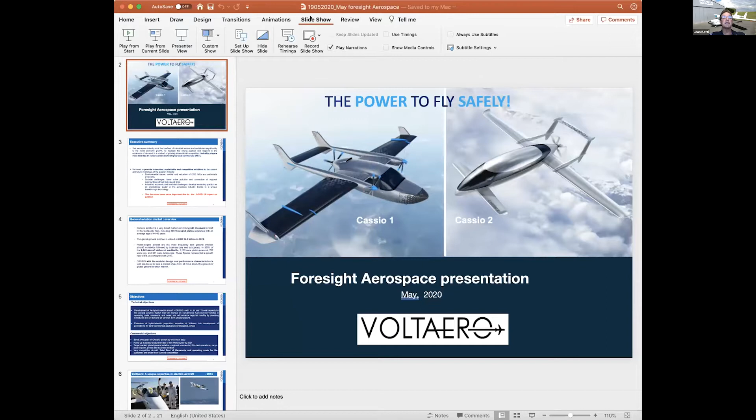Yeah, okay. So listening to Neil, there is not much I can add to that. I think he made a very good summary and assessment, and I fully share his view, quite frankly.

So what you see in front of you are two designs. One is our demonstrator, which I will come back to in a sec, that we're flying right now, fully hybrid, and we have tested 3 versions. Now we're at version 4, the 10 seats. On the right side is Cassio 2, which will be the future production aircraft, the one that will go into production, derived in 4, 6, and 10 seats. So remember these pictures because we will see them along the way.

If we look at the industry, and I'm not going to dwell too much on this because Neil just said it, there's going to be a lot more environmental issues. We're going to have to remove aeronautics from the environmental equation, even if there's sometimes a bad perception about that. Those issues are going to stay there. There's also going to be societal challenges like noise, pollution, connection to regional communities—those are going to have to happen without high-speed links.

And finally, you've got plenty of territorial challenges—we heard about Gatwick and all that just before, and it's true, we have to use what we have better. Today we don't use what we have, we don't optimize it. And this becomes even more important due to the COVID-19 impact on aviation, because people want to make sure they don't go into big crowds—at least some of the population—we want to be able to go to airports in all safety, not crowded, waiting 2 hours in line and so on.

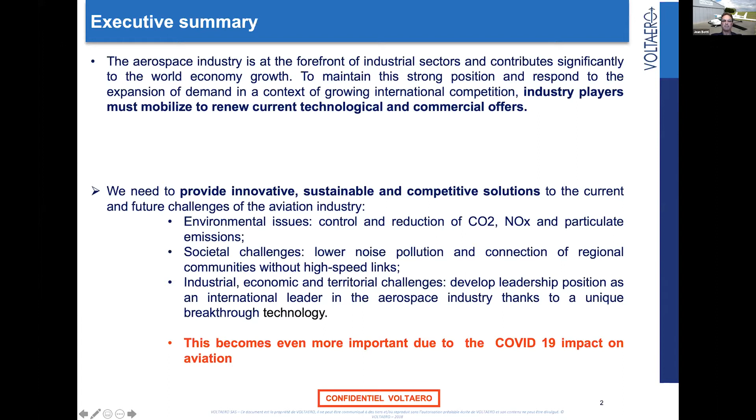So it's going to create some new opportunities, specifically for general aviation. And if we look at that market, it was already valued in 2018 at 24.2 billion, with lots of aircraft in the fleet, and a lot of old aircraft in the fleet. 360,000 piston airplanes have an average age of 44 to 46 years.

So there is a big opportunity to start something new here. And I'm not going to say that a hybrid aircraft—I have seen it written so many times that it's going to be a miracle. Electric hybrid in terms of total cost of ownership are going to be miracles—no, they will be competitive. They will be competitive with piston airplanes of today, but don't expect the total cost of ownership will be drastically changed. I want to make that point because we see so much fake news on this.

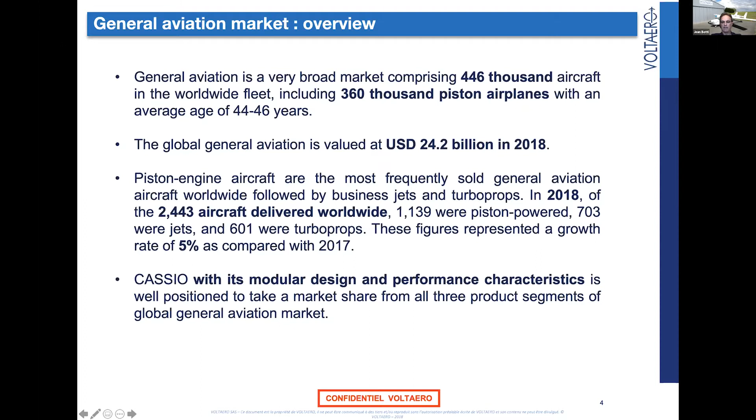Anyway, Cassio, with its modular design and performance characteristics, is really well positioned to take itself into this market. And we have 3 segments that I will expand on. First of all, if we look at technical objectives, the 4, 6, 10 seats is for general aviation.

And it's going to have to replace fuel-powered vehicles, obviously. It's going to have to have better operating cost—not a huge better operating cost—but better emissions and noise. And it's going to enhance regional mobility by providing scheduled, on-demand air services for smaller airports. It's also going to be very good for postal services, deliveries, medevac. This is going to be an extension of what we can do with our Cassio.

And we also, as VoltAero as a company, are expanding into powertrain development for other commercial applications, in particular helicopters and UAVs. Our commercial objectives are to put the Cassio, the 330, the 4 seats, into production by the end of 2022.

And we're planning to be at a rate worldwide, including Asia and the United States obviously, by 2024 at 150 planes per year. The target market is regional commercial, thin-haul operations, cargo, point-to-point, private and business aviation.

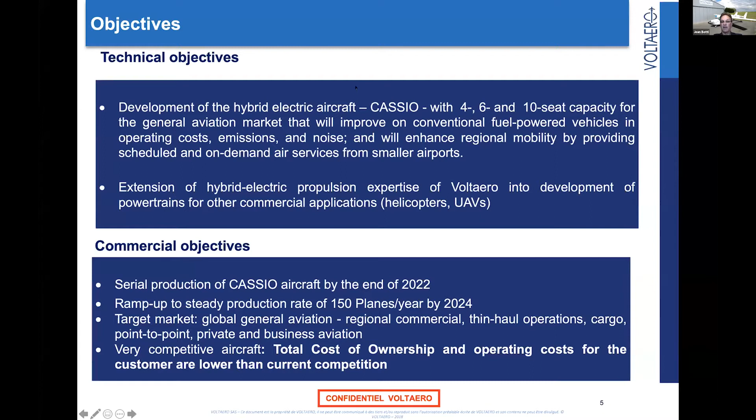It has to be a very competitive aircraft. We've done all the simulations based on true flights, true apple-to-apple comparisons, and we have a cost of ownership that is lower, but not drastically lower. It depends on whether you fly most of the time in hybrid or full electric, and if you start with charged batteries or have to recharge in flight.

Didier Esteyne is my associate, together with Marina Evans. We are 3 co-founders, and Didier was the one who crossed the channel during the historic flight in 2015. Before that, in 2011, we had flown the Cricri, a smaller 20 kilowatt aircraft that did acrobatics, then we went to a 60 kilowatt aircraft with the E-Fan in 2015, and now we're flying the 600 kilowatt hybrid airplane.

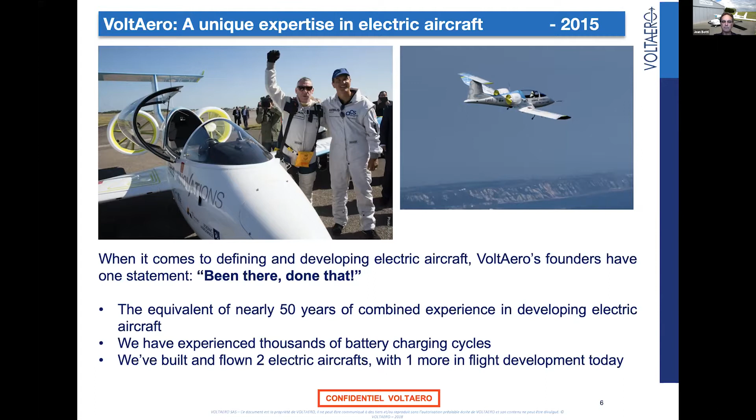The Cassio airplane has a modular concept, dual source of energy, noise reduction, and 200 knot cruise speed, which is very competitive with respect to the competition. I'm thinking about the Cirrus SR-22, Cessna 172, 73, Piper. Those are the kind of airplanes we are up against here.

Fuel economy and range varies depending on your mission flight. You cannot say hybrid is that much less than conventional, it doesn't work that way. You have to calculate each segment, and from each segment determine if you're in full electric, hybrid, mild hybrid or heavy hybrid. That has a direct impact, and that's how you calculate your cost of ownership, being TCO or DOC.

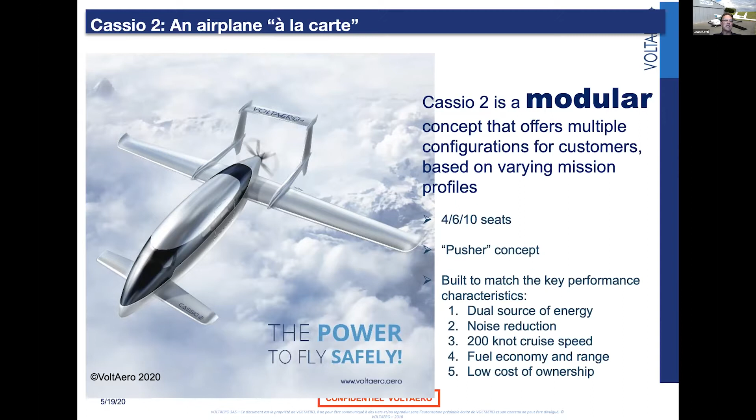It's going to be in the category of CS23. It will have 3.5 hours of autonomy with a possible extension to 5 hours, range of 800 miles, and takeoff and landing distance less than 1,800 feet. It will be able to land and take off from both paved runways and grass runways.

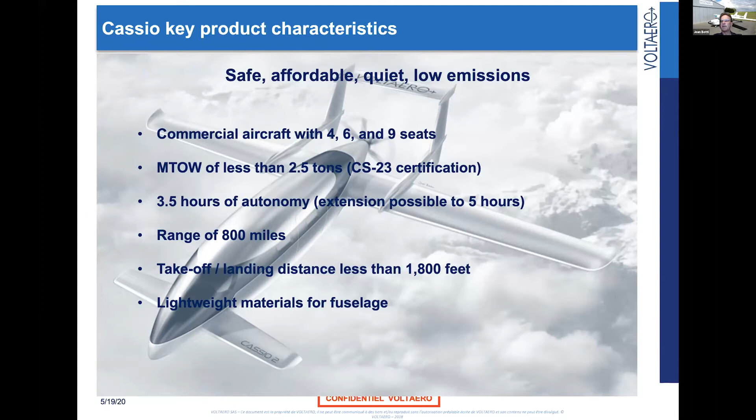In terms of power, the 10 seat version will have 600 kilowatts of power, the 6 seat version will have 480, and the 4 seat version will have 330. Those are all being validated in our Cassio 1 prototype.

I already spoke about the speed, and in terms of emissions, we can go from 20% lower in full hybrid mode to 100% if you have trips less than 200 kilometers. There you will fulfill your mission in pure electric.

Our design and concepts are all patented, and this concept of a dual source of power - being series hybrid, parallel hybrid, pure electric or pure thermal - provides unmatched safety, quite frankly, because we have multiple redundancies in the powertrain.

It's compatible with biofuels. In terms of noise, we are shooting for -4 dBA compared to conventional competition with silencers. If you take, for example, the SR-22 with a silencer, we should be around 4 dBA less than that. And there's no noise during taxi operations, there are no turning propellers in our airplane when it's taxiing.

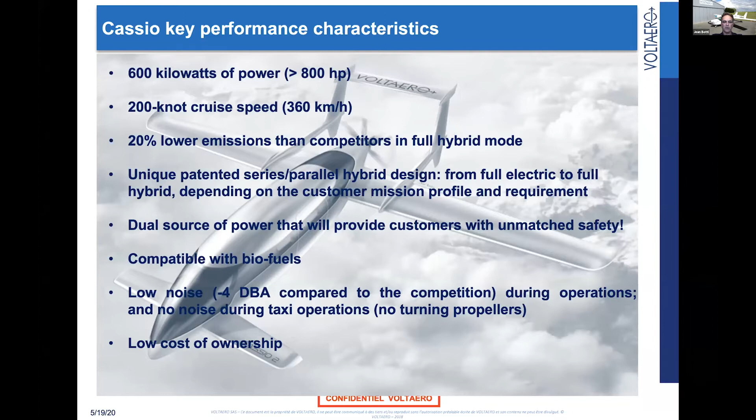I talked before about low cost of ownership. It's what I call an airplane a la carte. Basically Cassio can, depending on the profile you have, if you're in the range of 0 to 200 kilometers, 200 to 600, or 600 to 1200, you're going to use your airplane - and all of them can be used that way, the 4, 6 and 10 seats - you would do pure electric, mild hybrid, or heavy hybrid.

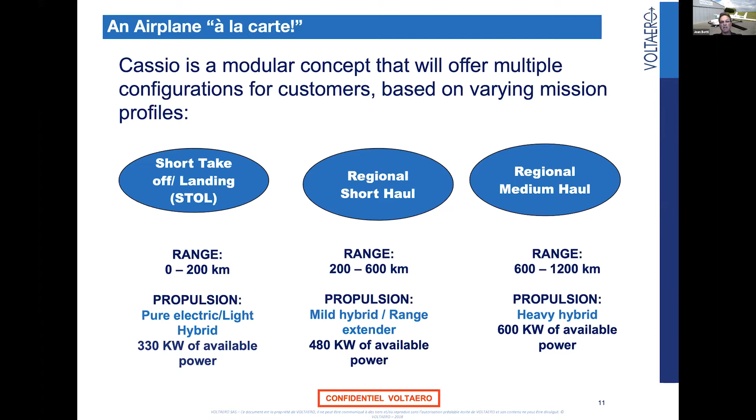The configurations that we have done are all studied to be able to fulfill these requirements, and obviously in each one of those segments your fuel economy will be very different from baseline.

So these are the airplanes that I was talking about before, that we are competing with our Cassio airplanes - very conventional ones, right now very well known. As I said, today the fleet is getting very old, and it offers an opportunity for us to jump in.

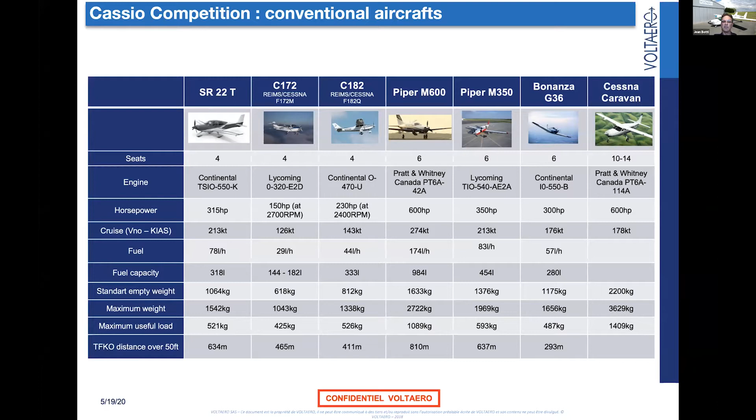If you look at the application by market, in red those are the routes, the number of daily flights that are less than 1 hour. In gray, those are the routes between 1 and 2 hours, and it's a lot of flights. So there's a lot of opportunity to fly between 1 to 2 hours, and even less than 1 hour, and that's why the application can be very different depending on the mission profile you have.

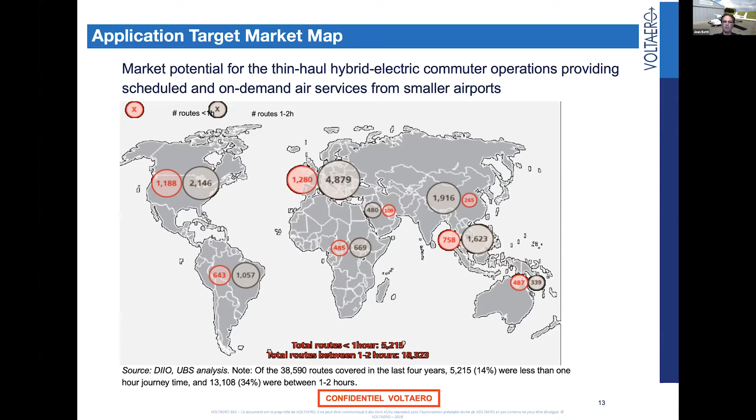Our timeline is to be in production by the end of 2022 with the 4 seats. 6 months later, we go with the 6 seats, and 1 year later, we go with the 10 seats. Right now, we are at proof of concept.

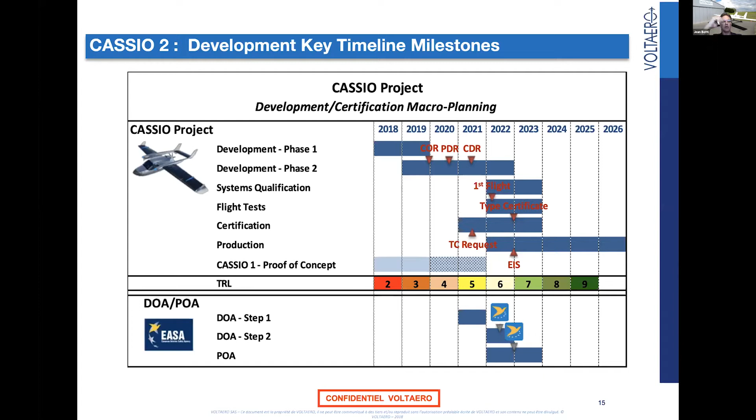We're finishing Cassio 1 completely, and we will have done all the testing of 4, 6, and 10 in terms of powertrain. That test bed will continue to help us develop Cassio 2.

I wanted to show you our airplane. So this is the flying airplane, and on the right side there is the Iron Bird, which we used for all the previous validations and modifications before putting that into the flying plane.

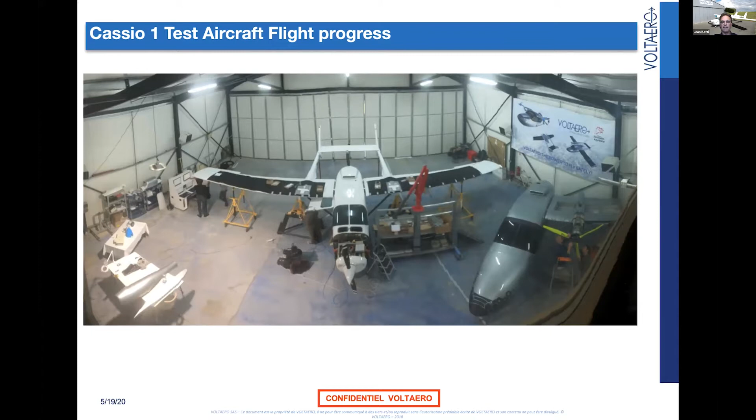This is our version 3 that we just flew last week. We had special permission, because we're confined with the coronavirus, to be able to still fly, since it was for professional use and testing.

This is the test we have done on the 4 seats. I'd like to show you a little movie of these flights, one of them, because we did 50 flights with this airplane.

So this is the 4 seats, with 2 Safran engines, electric engines in the front, thermal engine in the back, and that was the low version.

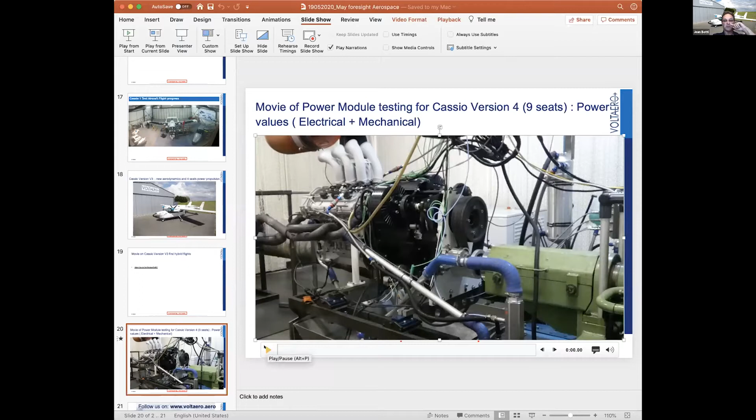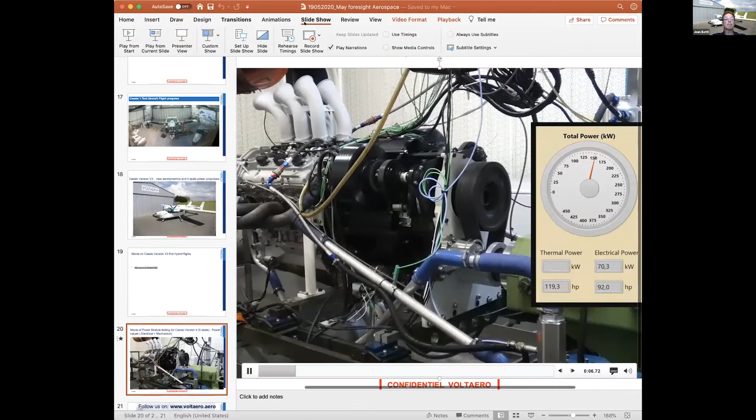Here we go, pay attention to the gauges on this. Sorry, I had to do that again.

So you can see we get to 600 horsepower on this hybrid rear power plant with 3 electric motors, and we will have 2 electric motors in the front.

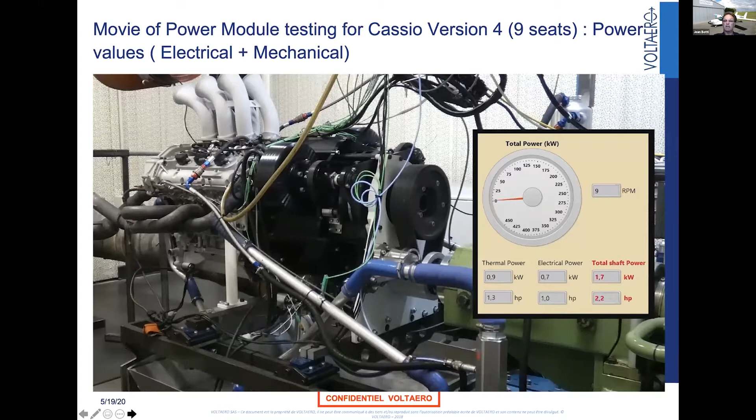This is right now on the test bench doing all the validations, all the mapping. Due to the coronavirus, we had to stop for a while, but we're back on track now, and we will fly this bird, the 9 seats powertrain, in July.

So this is where we stand right now. For us, the powertrain will be totally validated in all the versions, and as you can see, this will be the new design. If you pay attention, this is the 6 seats.

And that concludes my presentation.

That's brilliant, thank you very much sir. It's always interesting to see aircraft flying. I certainly miss it. As you heard during the webinar earlier, when an aircraft flies overhead, I'm outside either with my noise meter trying to find out how noisy it is, or on flight radar trying to find out what's going on. So thank you very much for that.

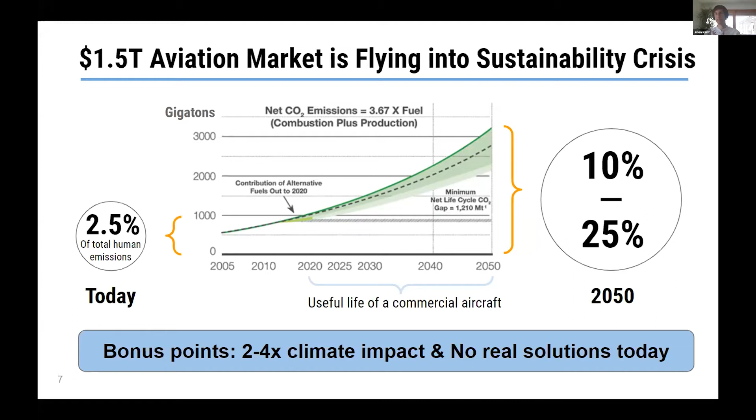The way we think the industry will get out of this crisis is by using renewably powered hydrogen electric aviation. Our role in this is shown on the right-hand side of the chart, as the powertrain provider. We work with leading suppliers on the fuel cell system, electric motors, prop pitch controllers, and similar components. We integrate everything, and work with airframe manufacturers, because we think they know how to build airframes pretty well, and we work with them to bring that product to market.

Even if we had a product in the market today, it wouldn't be much use, because to get hydrogen and electric aviation to take off, you also need to think about the ecosystem that needs to be in place, at the very least hydrogen production. The way we think about it is that you get not only the best environmental performance, but the best economic performance, if you employ localized generation of hydrogen through electrolysis. Because of the scale that sub-regional aviation can have, that becomes the most economically meaningful as well.

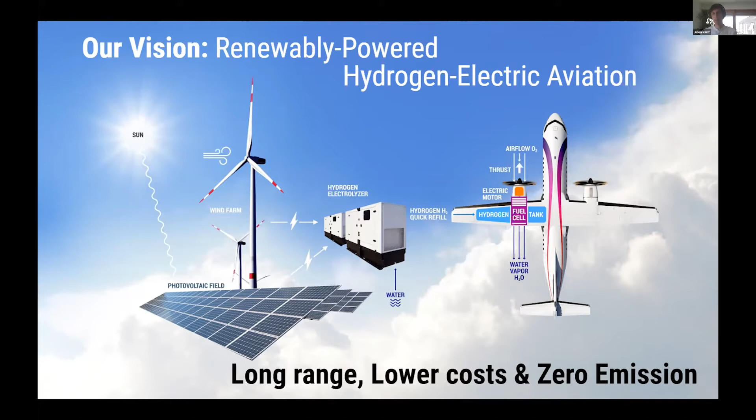What I want to dive deeper on now is the bottom part of this chart: longer range, lower cost, zero emissions. The question we always get asked, and we're by now a 2.5-year-old company, is how does that all compare with battery electric or hybrid electric? I just want to make one comparison to battery electric today. If anyone's interested how it compares to conventional turboprop or electric, we've done extensive analyses and are releasing a white paper on that in the next couple of weeks, so happy to dive deeper on this.

The general idea is that what limits you in performance on the battery side is the energy to weight ratio, and that's where hydrogen has a lot of benefits. You can get roughly 4 times the gravimetric energy density out of the system compared to the best battery system, and that's even with gaseous hydrogen, which is what we're employing in our very first step. If you moved to liquid hydrogen, you get roughly another factor of 3 in range. That's just the performance angle, since range can always be traded off with payload.

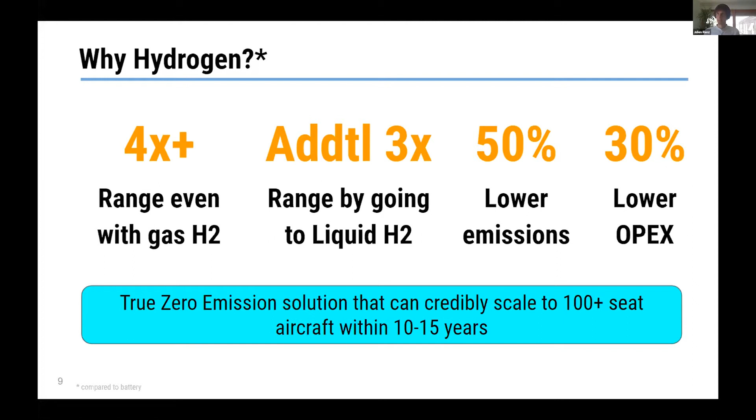What we are working towards at the moment is what we call ZA600, a 600 kilowatt powertrain that could essentially replace the engine in most of these aircraft here. So that is what we will go to the market with, and our timeline towards certification is 2023.

And as I just mentioned before, the way that this is interesting to operators is because it provides potentially lower fuel costs, lower maintenance costs. You have faster turnaround times than the battery electric case as well, potentially. And you have very low emissions from end to end.

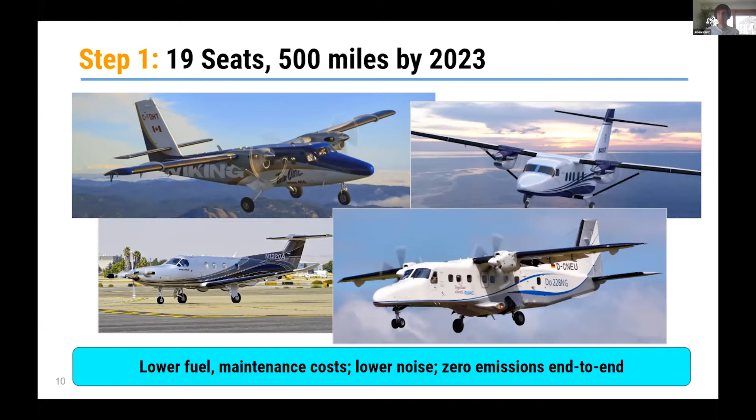So where are we in all of this? I think some of you probably have seen some videos of our flight tests in California last year before we set up our operations here in the UK, and the beautiful Piper aircraft here in the UK now as well.

In the middle picture, we have a hydrogen fueling truck actually fully up and running, and we have a hydrogen test lab established now in Cranfield that we can start using as the university lifts its restrictions. As soon as post-COVID everything becomes operational again, we're planning to start flight testing in the first half of June.

So that means by the next time the Foresight Aerospace conference comes around, I'll show you flights from the UK and no longer the ones in California.

All of this is funded by the UK government and the Aerospace Technology Institute in the HyFlyer project, where we work together with EMEC and Intelligent Energy. That will culminate by the end of this year in a long distance demonstration flight from Kirkwall up in the Orkneys, where there's already a lot of renewable hydrogen existent, from there down to Edinburgh most likely. And we will look forward to sharing the results of that then with the wider audience here as well.

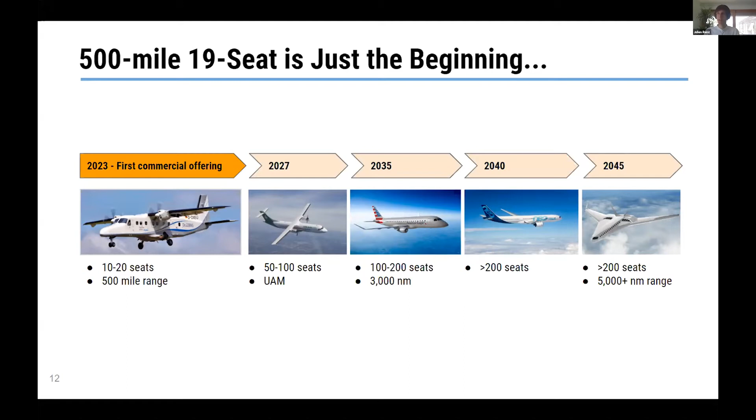And so with that in mind, I would like to end this short presentation. Please reach out to me if you have any questions, if you want to go through some of these numbers yourself, if you want to see some of our progress yourselves. And maybe we can actually put up my last bet again now to the screen, Eric, if that's possible, and we can see if you actually believe, just like I do, that we can actually fly zero emission, at least across Europe by 2050.

Thank you very much for that, sir. So the results are coming in on your last bet: with or against Julian, will Helena fly to her hen do on a zero emission aircraft? 86% saying yes so far, and we're only about halfway through it. I'll take that, I convinced sufficient people. That's brilliant, we'll let that play out and get back to that later, maybe at the end of the day when the poll is closed.

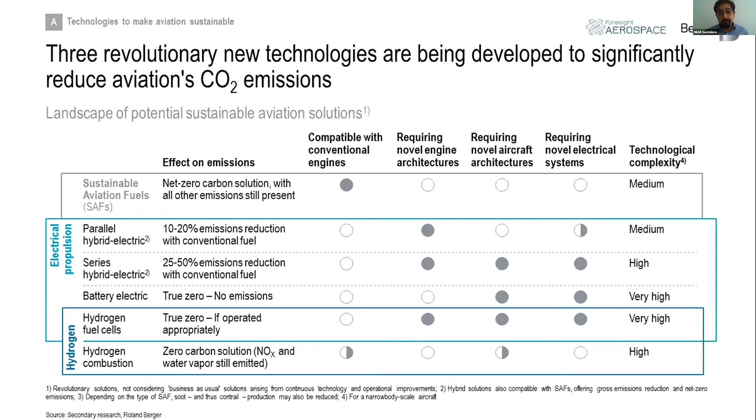Now, with all of this in mind, let's take a step back, because throughout the day we've mainly spoken about carbon. We've touched upon other greenhouse gas effects, but I'd like to spend a moment here because this is a challenge I wish was discussed even more. Depending on the estimate you believe, the total impact of aviation's radiative forcing footprint on global warming could be anywhere between 2 and 4 times as much as just the carbon portion.

Now, carbon is obviously the longest lived greenhouse gas. If you look at all human emissions ever created, carbon is the main problem. But with aviation, you have to consider all these other emissions, all these very different mechanisms by which they're produced. Carbon you can't really escape—it's the number of carbon atoms you're burning, and in an atmosphere where you're burning it with oxygen, you end up with CO2.

It's very deterministic. NOx is not as deterministic—it's more a function of the temperatures achieved in combustion, as well as the degree of lean burn versus rich burn in your combustion chamber. Water vapor is a result of combustion, but it can be managed. Then you have sulfates and soot, which over the past several decades we've actually been fantastic at reducing. Think back to Boeing 707 engines—black plumes of smoke coming out the back. We've been very good at reducing that soot and other particulate matter. But unfortunately, the contrails picture is not something we've been able to sort out yet.

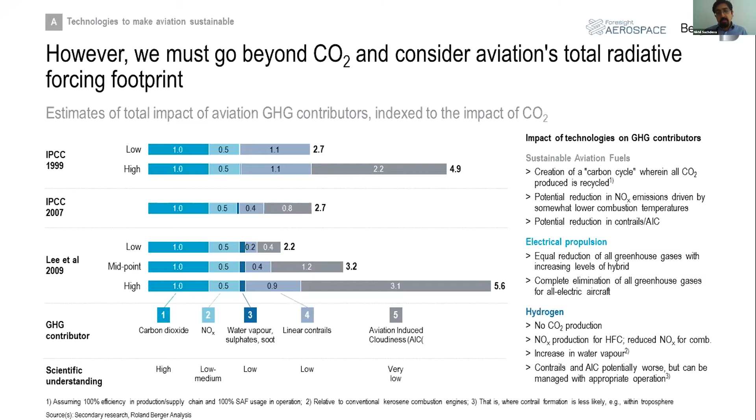Now, considering the technological barriers and benefits here, if you could wave a magic wand and achieve whatever you wanted, you would just go for all electric or possibly hydrogen fuel cell aircraft. If that's what you could do, that's the ideal solution. However, it gets a bit more complicated because battery gravimetric density isn't quite there, hydrogen volumetric density isn't quite there, and the ranges and distances we want to fly and the sizes of aircraft we want to consider for large commercial—the big emissions generator within aviation—you need to be a little broader in terms of your solution set.

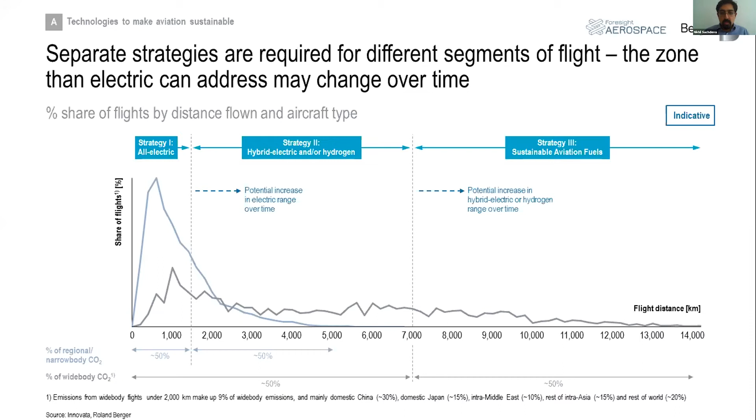So with all of this in mind, let's just deep dive a little bit into electric. I don't want to spend too much time on this. I think a number of you may have seen these kinds of slides before, but it's just interesting. We've been looking at how the announcements picture has been changing.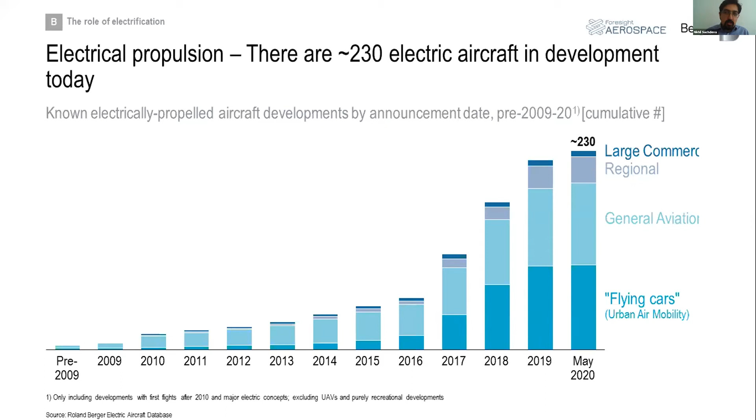As of last week, which is when we did this count, there's about 230 aircraft which say that they're going to be electrically propelled. But the interesting thing now is that actually, rather than the exponential growth that we were seeing into 2018, 2019, we've definitely seen a bit of a slowdown. Now, this is actually not the COVID effect. We'll come to the COVID effect in a moment, but if you deep dive into the quarters, we've actually been seeing a slowdown from the beginning of 2019 all the way to now. And it's a nice S-curve that we've actually achieved.

It seems that the boom that we saw in urban air mobility predominantly, but also to a very large extent in general aviation, went between late 2017 through to 2019. And we've been through that now. Now it's a matter of these developments actually coming to fruition. And it's fantastic to hear how many are getting close to their first flight.

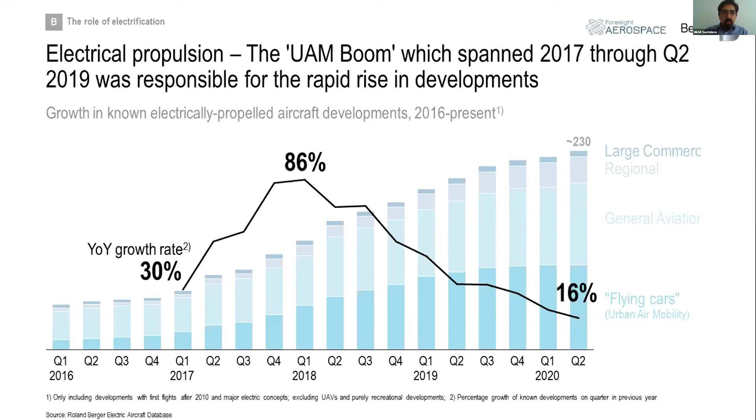But now to the COVID effect. The interesting thing that we've also been following is whether or not this crisis, this existential crisis that aviation is going through and that aerospace is going through, will accelerate or decelerate the move to sustainable aircraft.

And even though I think the mood in the discussion today, and I would argue that the audience and the presenters today are largely believers, right? So it's maybe a slightly skewed audience. I'm definitely one of them, by the way. I'd say, despite the many reasons why we've been hearing today that actually we could get to electric faster, we could get to hydrogen faster, there's a lot of reasons why we might be seeing a deceleration as well.

We've had a descoping of the E-Fan X program already. There's probably a number out of that 230 that haven't officially gone out and declared it publicly, but are suffering financially quite significantly as investors might withdraw, as R&D funding from incumbents might slow, as they try to tighten their belt, right? And a key thing, I think, is a potential delay to the next generation large commercial aircraft as well.

Boeing, given the 737 issues they were suffering, it was quite popularly thought that they might accelerate their next aircraft, the 737 replacement, to compete with the A321neo. Now, with the financial and other issues they're facing, could we see a delay to Boeing, and indeed to what Airbus does? And when we look at oil prices, there's less incentive for aviation to reduce fuel burn, which is one of the reasons people have been trying to become more sustainable, at least in the short and medium term.

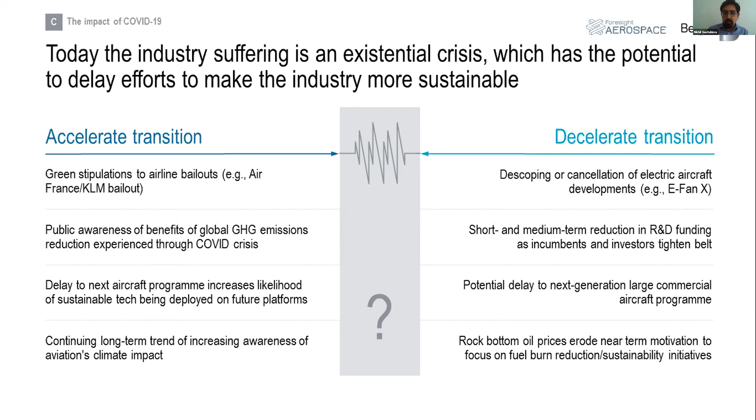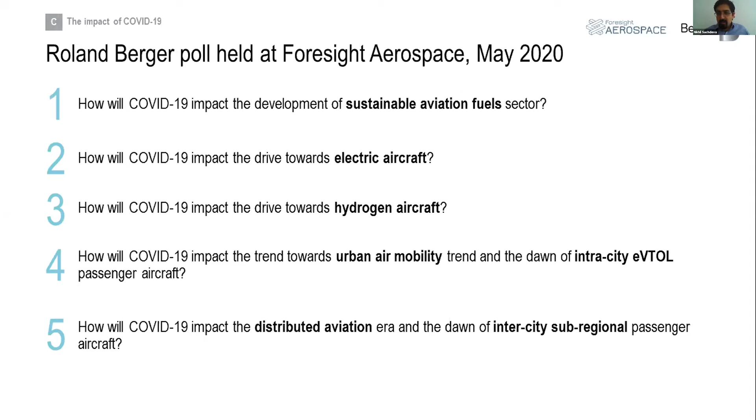But let's put all of that aside and see what you had to say. We had 77 respondents to these 5 questions. Thank you very much for responding this morning, and thank you, Eric, for sending me the results.

Interestingly, SAFs and hydrogen aircraft. Looking at questions 1, 2, and 3 first, the sustainable aviation technologies, electric is where everyone seems to think there will be an acceleration, which is really fascinating. Whereas the audience is a little less certain on SAFs and on hydrogen. But considering questions 4 and 5, more about aircraft architectures, urban air mobility, people are quite bullish on that. Again, no surprise given the audience, but the distinction is interesting: people believe the intercity subregional transport aircraft with various sustainable or powertrain types will succeed.

What I'd like to request—unfortunately Zoom does not allow for comments in these polls in terms of why these are the votes we got—so as a request to the audience, if you wouldn't mind putting your thoughts on why these things might happen, just anything you feel strongly about on this chart, or that you noticed when you were filling out the poll. It'd be great to get your qualitative view to bolster this quantitative picture.

I'm very hopeful this is indeed the case, that COVID doesn't slow all of this down. We have 2030 targets to hit if we're going to hit our 2°C target as a species, as a planet, and we have 2050 targets to hit. I'm very hopeful that the bullishness we've seen from this audience actually comes to fruition. With that, I'd like to draw to a close. Back to you, Daryl.

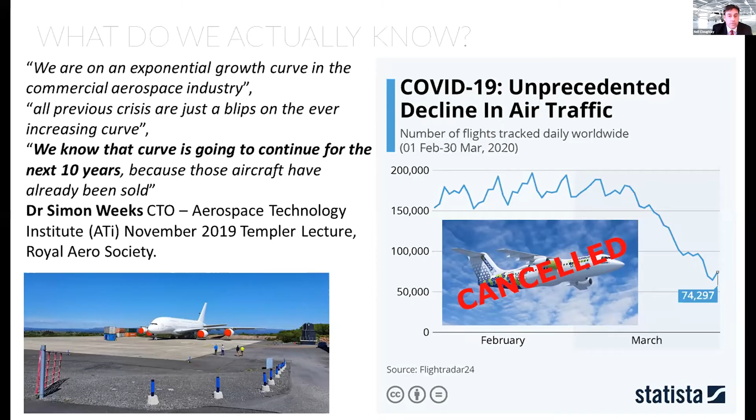But what's the collateral? And the collateral really is this. And unfortunately, even when the Transport Secretary, who has supported and endorsed us, is turning around and asking people when they're going back to work to maybe avoid public transport because we've had to reduce the amount of trains and capacity, etc., then clearly we have an issue here.

We have something that is going to force more people back onto cars. But if we're then closing down parts of the city for e-scooters, bicycles, etc., we're going to get more congestion and choke points in different areas, and so on. This is going to change the landscape of commuting on a daily basis for some foreseeable future.

We are seeing pickup in air traffic now. It's really quite interesting to see, even just the last couple of days, the air traffic volumes picking up. But this is a problem that is going to have some long-term implication to our sector.

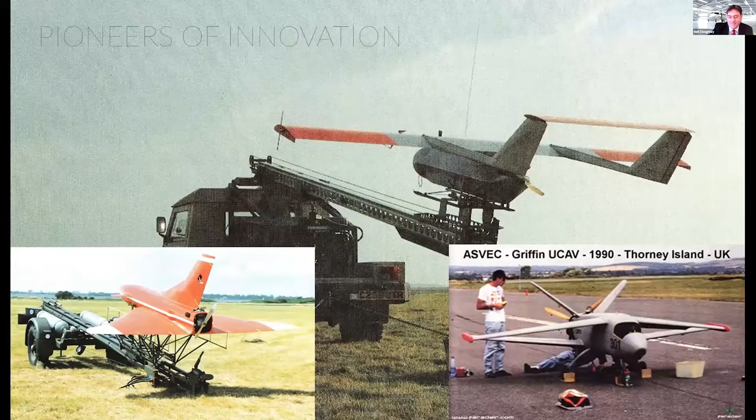We've done a lot of work with joined wing technology. And to see this week again Embraer's announcement about their new pod-like aircraft that can transition from a road vehicle to an aircraft, and it's got joined wing tech, is obviously great news. It's fantastic to see. But let's talk about our beastie.

We've given an awful lot of presentations now over the last 6 years that we've existed. 2014, we started this journey. We started talking about hybrid electric flight, and we say bio because we've always intended the aircraft would fly on biofuel, SAFs. It can fly on Jet A, of course, but really the idea was that the aircraft is designed specifically for the powertrain, and it always has been.

So when people are suddenly shocked and surprised that if they consider an all-electric regional flight to the Scottish Islands, for example, and suddenly realize that inclement weather may force you to go back and you don't have the range, hybrid was always going to be the option. And it's what we've been talking about for 6 years.

So listening to Jean Botti and what he's working on is fantastic. I do wonder if I'd had Jean sitting alongside me when we first went to sit and talk to the ATI in 2015, whether we'd now actually have our aircraft sitting on the ramp ready to go. But that's the nature of the beast. Sometimes people may not believe you until they see it with their own eyes.

But what we've got here is a workhorse. It's an environmentally neutral cargo commuter workhorse. So we announced this at Revolution Aero, and we basically revealed the fact that the work we've been working toward was a 19-seat airplane. Lo and behold, we now see Pipistrel now aiming towards the same target that we're at as well.

And the aircraft has always got to have been a cargo passenger workhorse. The aircraft has got to do a range of roles and mission capability, and hence why it's always had the passenger cargo door, so we can carry 3 LD3 containers. Now, we've walked through the aircraft design. A lot of people have seen it with the 3 wings, and they go, oh, it's very draggy, why do you... The aircraft is designed to carry a heavy payload, take off and land in a real short distance, and utilize the hybrid propulsion system.

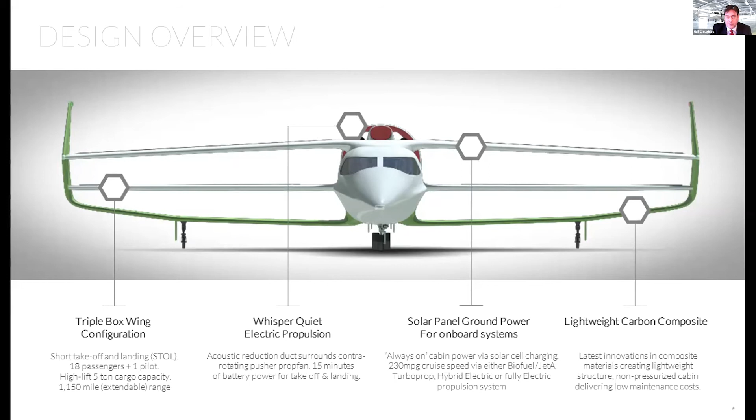If you look at the operational capability, we intend to use a traditional turbine. So the primary flight thrust will be powered by the turbine, connected to a traditional propeller, but it's a prop fan. We then use electric propulsion in contra-rotation, and basically switch the emphasis between the power sources. So we can throttle back the turbine and boost it with electric for the takeoff, then the turbine takes over for cruise mode, and the electric winds back.

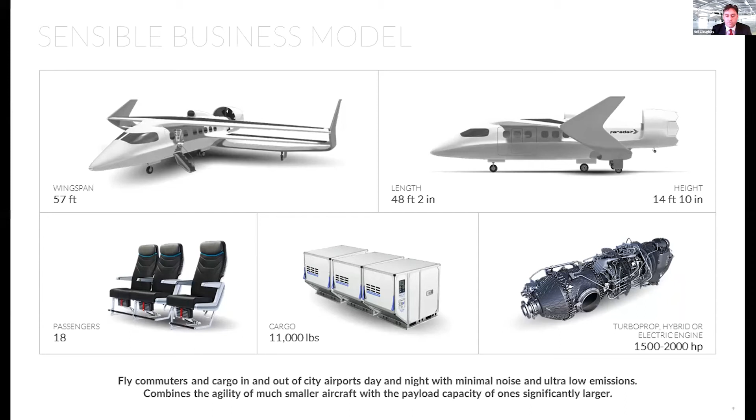By utilizing SAFs and biofuels as well, what we're really doing is trying to provide an aircraft that we can get into the market very quickly with proven, trusted and tested technologies, without massive infrastructure change. It's a self-charging hybrid. We don't need a whole bunch of new infrastructure at airfields. But once we finish flying passengers, we're then able to take cargo and fly during the night, making as greater use of that asset as possible. That's the key thing, how much are you going to use the asset. So we've got a range of different role capabilities.

We sat last year with the Secretary of State for Defense, talking about opportunities for UK Armed Forces. Just before we got locked down, I was in the US talking with Pentagon officials about our military ideas. And of course, our civil applications. We're looking at opportunities where we can not only do passenger, but also other opportunities.

So here we've got an aircraft that is traditional in the sense that it is a traditional airplane. It includes some innovative technology, some new materials, new propulsion methods, but really it's something that you can get your head around fairly easily.

That's why one of our advisory board members, Toby, when he first got involved and looked at the project, he's been involved in the certification and deployment of a 5th generation fighter and all the air assets, the carriers. When he's had a look at it and thinks we've got a really good opportunity, then we're quite excited about it too.

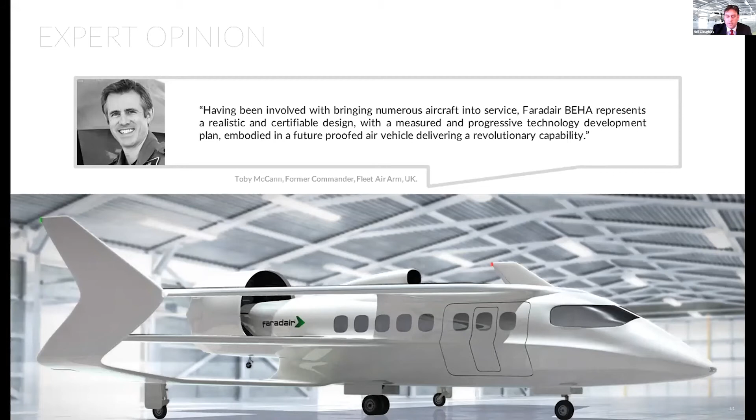An awful lot of prototyping and testing work has gone on. We're building on the work we did 30 years ago with Joined Wing Tech, so we've done a lot of our proof of concept work a long time ago. Since then, we've been evolving from the original design we first came out with in the market, which was really more of a placeholder. Now we're moving forward to where we want to be, which is ultimately a sort of 19-seat sized aircraft. That work has been going at a pace as funding has permitted, which is frustrating.

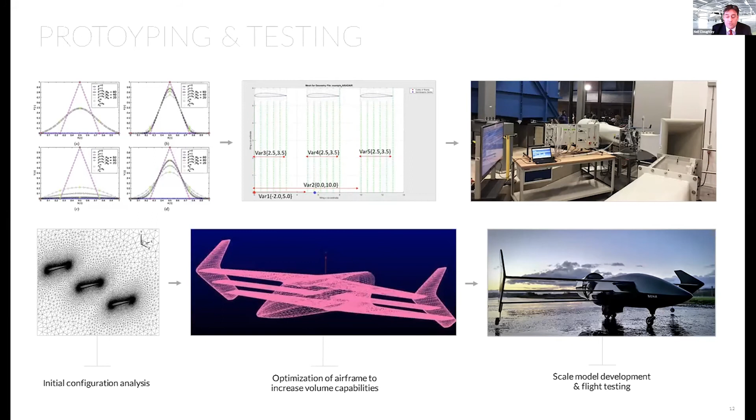Had we had the funding support that we'd requested a long time ago, we may have the world's leading hybrid electric aircraft sitting on the ramp today. It isn't, it's what it is, and we've done the best that we can with the resources. So what are those resources and how have we done?

If you look at the contact level and support we've managed to achieve in government, the current Secretary of State for Transport has given his full endorsement and backing. We sat with the Secretary of State for Defense and now Paymaster General and Cabinet Office, Penny Mordaunt, and the former head of the Defense Select Committee is also a huge supporter. I released an article recently, basically asking a prime interest question on resilient aviation and the future of sustainable aviation. And you can see interest there from GKN, Airbus, Rolls-Royce, Cranfield University, which is a fairly familiar sign with a lot of the posts we make.

Unfortunately, none of them have actually yet contacted us about the program, and it's something we have found a real big challenge in this country, where Jean Botti has basically been able to get an awful lot of that support in France. We struggle with that.

So to date, we have received zero taxpayer funding in anything that we've done. It's been funded by angel investors, etc. But we've been pushing this story and this agenda with the aircraft now for 6 years.

If anybody wants to question where the true pioneers of this vision have come from, we were putting this before the Future Flight Policy Committee in 2017. And it is frustrating that we haven't gotten further. There is nobody more frustrated than I right now that we don't have the aircraft sitting on the ramp.

And now we're facing a situation with a pandemic, which has made the challenge even harder. But we are now getting interest from airlines and investors, especially from overseas, which places us in a really awkward position. Do you then pursue the opportunities and take the project overseas?